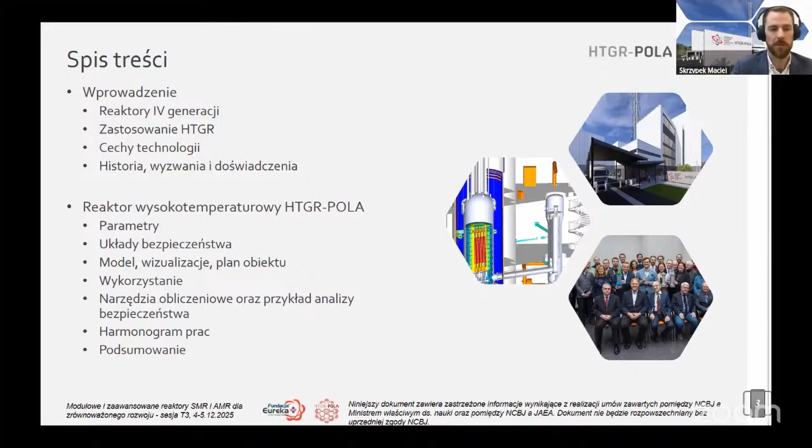To end with, I'll briefly describe the schedule. We have completed the core project or basic design stage, covering a considerable portion of the conceptual design. Still, there is a lot of work to do before the reactor becomes capable of displaying its technological potential within Poland. And I'll wrap up my presentation with a brief summary.

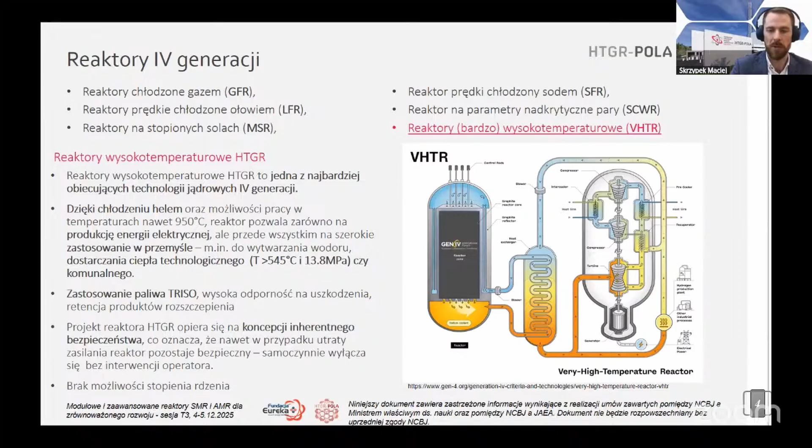Now briefly about the prospective applications of such high-temperature reactors, the advanced Generation 4 reactors. First, they are capable of providing adequately parameterized heat to industries, chemical, petrochemical, and any energy-intensive industry, since the temperature ranges, as I said, in excess of 700 or even 950 degrees Celsius for primary circuit helium.

After giving off the heat to the secondary circuit part, we can attain steam close to 600 degrees Celsius or even higher for helium-helium exchangers. This gives us almost 300 degrees more compared to what light water technologies are capable of offering, be it SMR, that is scaled PWR or BWR reactors, or large-scale ones, whose steam and heat temperatures range between 270 to 300 degrees Celsius.

The secondary circuit temperature of around 600 degrees allows for providing heat to branches of industry that involve iron smelting or generation of hydrogen by means of a sulfur-iodine cycle. Quite obviously, electricity production or gasification of coal. As regards lower temperature ranges, petrochemical industry and chemical paper manufacture can successfully make use of these properties.

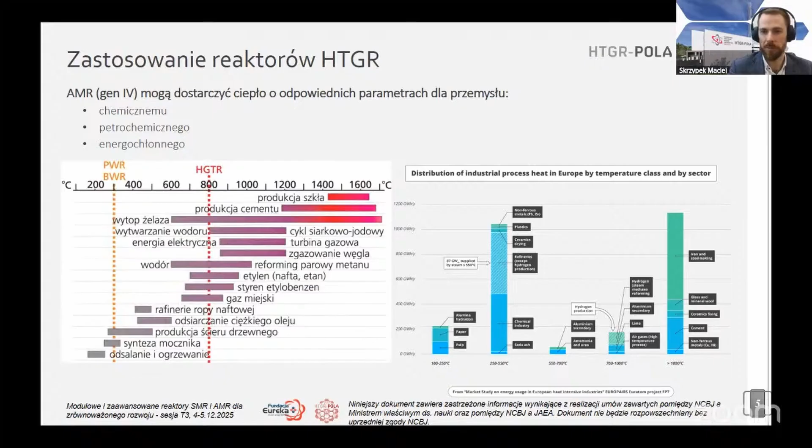When implementing and then commercializing the technology, we can really see a remarkable potential of its use, be it in Poland or elsewhere across Europe. I think I now should cover the major features of the technology of our interest. As I've mentioned, the very high temperature of helium at the reactor outlet is primarily apparent.

The applications in technological processes or electricity production can be notable. On the right-hand side, the HTGR-POLA diagram schematically shows the reactor as a 30 megawatt one. The primary circuit is marked in red, the section where the hot helium is directed to the steam generator, where it releases heat to the feed water, which is subsequently heated, superheated, and steam is generated, whose pressure is 13.8 megapascal and over 560 degrees Celsius.

This is the secondary part, which subsequently leaves the containment and is led to the engine room. Then it may go directly to the turbine, where electricity is generated, or portions of the steam can be used to produce electricity for the plant's own needs, the remainder being sent to the reboiler, where it can be used as cycle steam, basically useful in industrial processes.

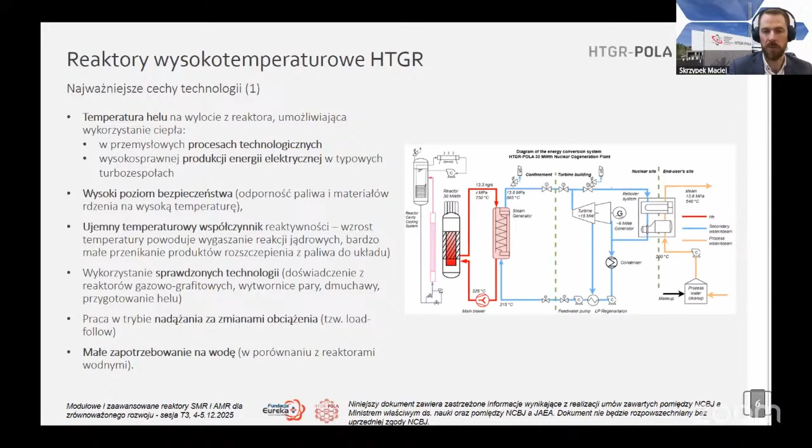The scenario of core meltdown, impossible as it is, is prevented due to the following factors.

Compared to light water technologies, the underlying concept here is very different. And what I mean by that is primarily a low power density, almost two orders of magnitude lower than the one in light water reactors. Consequently, the decay heat is reduced. It gets proportionally lower after the shutdown with use of reactivity control systems, or caused by the negative reactivity coefficient.

At the very beginning, once the reactor is shut down, the power drop can be typical, like 7 to 5%, then decreasing exponentially to 1%, and then tenths of a percent, this being much less power to dispose of compared to light water technologies.

Moreover, the low density of the structure of the core itself is due to the use of several materials around the fuel, while helium itself is of small thermal capacity. Graphite, the material used in the core's construction, has a considerable thermal capacity. Its thermal characteristics are very good, including thermal conductivity, and primarily it is resistant to high temperatures. All in all, it perfectly fits as the reactor's construction element.

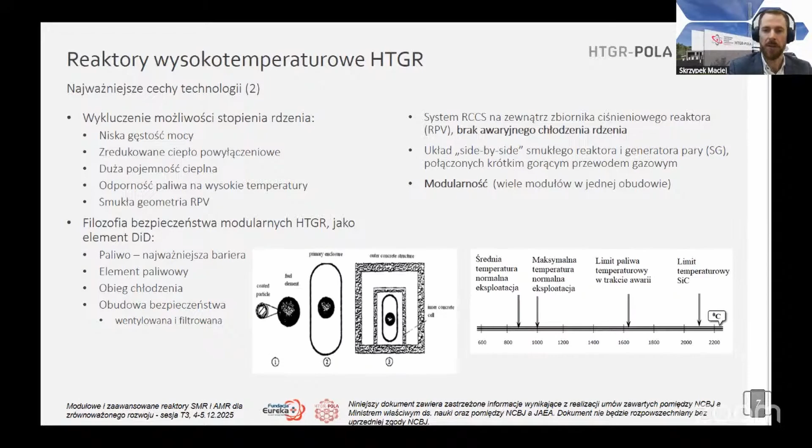As I said before, HTGR reactors, whether experimental or commercial, have been implemented and applied in the past. Hence, we've placed a bet on this particular technology, since because of its high TRL coefficient, it has a proven record. It first appeared in the form of spherical or prismatic pebble-bed technologies as applied in China, Japan, the US, and Germany, where it saw powerful development.

Rather than modular reactors, those were high-power technologies, a concept that developed in the 1970s, which sought to produce high amounts of electricity and heat. Although quite successful, the approach changed with time as the inherent safety of the reactor came to the fore.

Based on the 10 megawatt HTR-10, a research reactor still operating in China, Chinese engineers developed a high-temperature reactor called HTR-PM, 250 thermal megawatts, with a capacity to generate roughly 210 electric megawatts based on two reactors operating with one turbine set. This technology has been succeeded by...

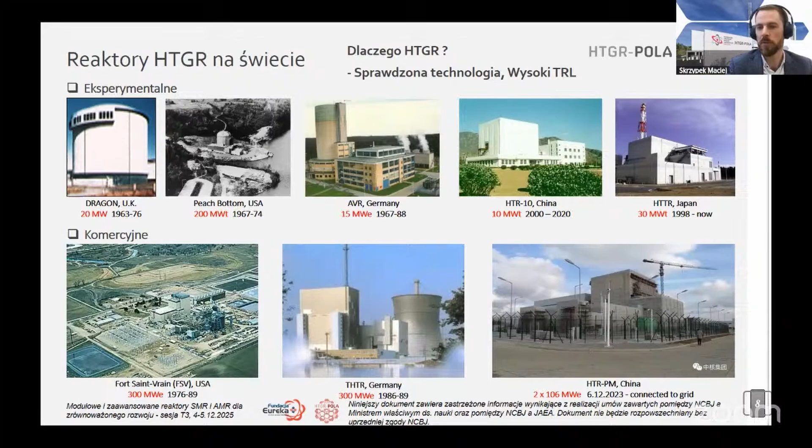How did those projects develop? Let me use the Chinese examples, or those of Japan. Our national center collaborated with the Japan Atomic Energy Agency. Basically, the task is to turn a research reactor into a commercial reactor.

It is quite a long way to go, and therefore the HTTR in Japan or the HTR-10 in China first attained criticality at the turn of the century, and it took 15 more years or so to put an operational commercial version in place.

To build a commercial reactor straight away is perceived as a somewhat risky venture industry-wise. Hence the need for a research reactor that allows excluding certain shortcomings and other problems on a small scale, demonstrate the operationality, and only then apply the concept at a commercial level.

In Poland, this approach enables the stakeholders to talk to those in charge, to actually make the state authorities, such as the nuclear regulatory authority, as well as industry, aware of the technology, demonstrate to them its safety features and economics, and the cogeneration potential based on the use of high-temperature steam in a variety of sectors and purposes.

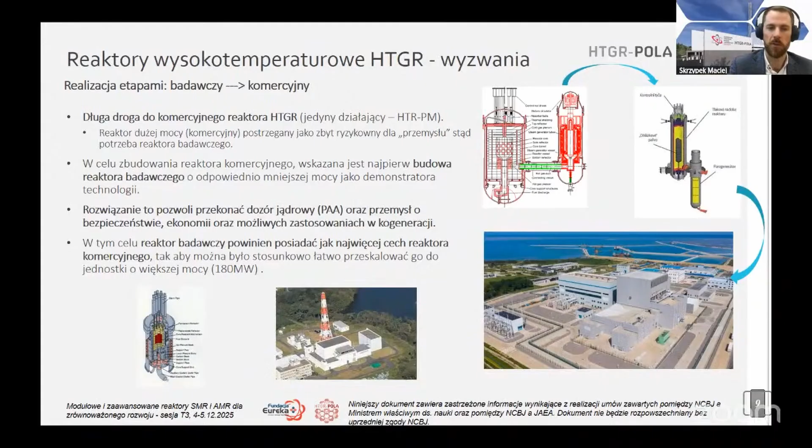Now about the actions and research carried out on HTGR at the National Center for Nuclear Research.

Having said that, to actually implement the technology, one needs years of effort. The technology in question has been under development at our institute for quite a while now. We've been in touch with it, so to put it, for a decade now, really.

In 2017, we got involved in a European project to develop a Gemini Plus reactor as part of an international consortium. The National Center was the project's leader, and we demonstrated the reactor's cogeneration potential, taking advantage of the technology, showing its safety, robustness, and teaching ourselves how to design such a reactor, how to analyze its safety features, and primarily involving ourselves in an international milieu, drawing upon our French, German, and Japanese colleagues' experience.

As a follow-up of that project and the National Center's engagement, a national HTR was developed as a pre-concept, or the first tangible Polish-made product in view of a future HTGR. That was back in 2019 to 22.

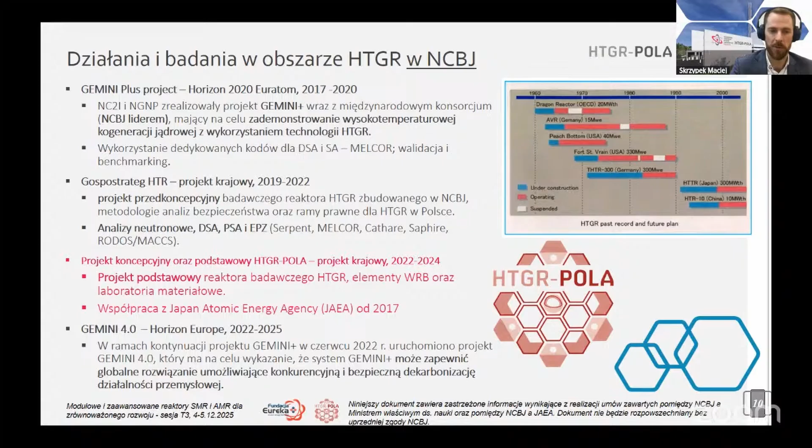Now, what's the mission of the demonstration reactor known as HTGR-POLA? It's apparent in its main functions, actually 4 of them. First, competence building, based on the perspective of development of the demo reactor and on the design process of its commercial counterpart. We have shown that designing competences can be attainable.

While designing, licensing ought to be always borne in mind as the next step of the process. While designing, the related supply chain should be taken into consideration as well. And as much as the demo reactor is the first of the kind, and indeed the first and only, keeping in mind the solution's modularity, the supply chain has been mapped for the elements and components indispensable for the technology concerned, based on the need to ensure a high rate of supplies from basically the local market, this being highlighted as a competence building aspect.

Next, construction and operation are very important competence building elements. As the National Center, we are presently running Poland's only active research reactor in close cooperation with actual operators elsewhere, this giving us clues of how to become an operator and what requirements should be followed also in the design process.

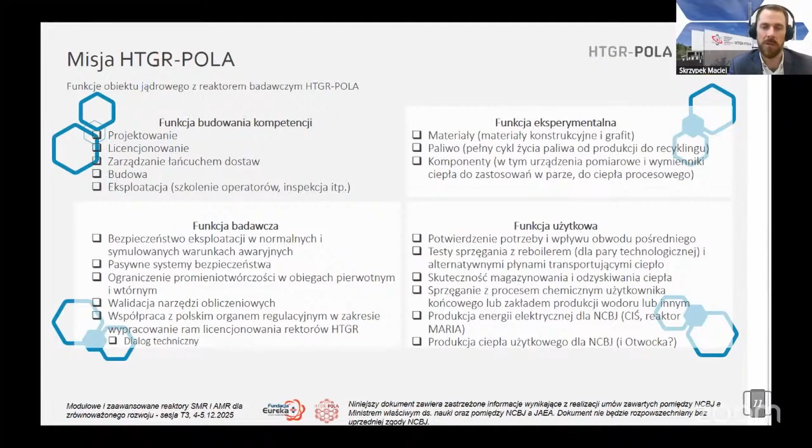We've proved capable of demonstrating the transfer and storage efficiency in this respect. I've mentioned our close cooperation with the Japanese agency and our Gemini project experience.

Consequently, HTGR-POLA is based on two concepts, some of its elements having been taken over from the Gemini Plus solution, while some others have been proposed by our Japanese partners.

As far as Gemini Plus is concerned, with the forthcoming commercial reactor concept at the back of our heads, which would follow the Gemini Plus geometry, also the active core concept, the structure of the fuel blocks with separated coolant flow channels and separated fuel element holes within the fuel block, are likewise taken from Gemini Plus.

The same is true for our proposed reactivity control system and dedicated fuel elements or reflector block elements, and also for the whole energy conversion system extending to heat transportation and use of the reboiler. Furthermore, certain safety systems do follow the Gemini Plus solution.

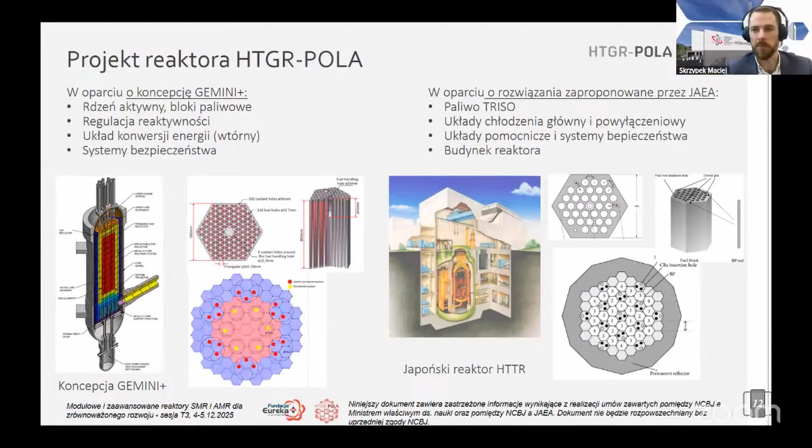Let me show you a block specimen, if you can see it, right hand side corner, being a model of the Japanese fuel block, and there's the other one of our POLA. The solution of one block placed over the other together makes up the core, which is a solution shared by the Gemini Plus and HTTR concepts.

As I've said, the core as such is composed of fuel blocks. Now let me invite you to look deeper inside into the very fuel particle. TRISO namely consists of uranium dioxide particles coated by several layers.

The first is porous pyrolytic carbon, the buffer layer. Then comes another internal layer of pyrolytic carbon. Then we have silicon carbide, which is crucial for the fuel's chemical resistance, and the outer pyrolytic carbon layer, ensuring the particle's operation under high temperatures.

Then there is a pretty small particle of less than 1 millimeter in diameter, which in itself forms a sort of safety containment for the fuel element inside and is placed in the fuel compact. The fuel compact is in this case a 5 centimeter high cylinder, diameter 12.6 millimeters, within which 2,500 to 3,000 TRISO fuel particles are compressed.

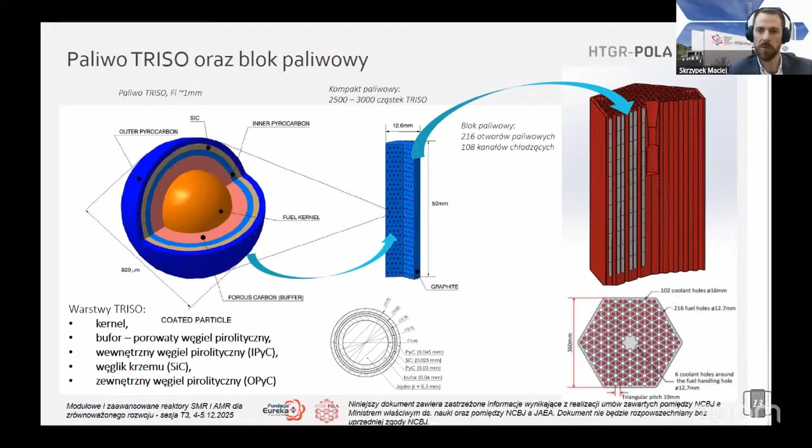The compacts enclosed in the fuel block release heat to the coolant by conduction through the graphite element to the coolant that flows inside separate holes through the block. The size of the block is 36 centimeters from side to side and 60 centimeters in height.

Using it, we can create an active core and a reflector surrounding it. These are the two important areas in the core, which is designed to consist of 6 fuel blocks of the sort we've seen in the picture.

The cross-section to the left shows the core's structure, consisting of a total of 13 full blocks plus 6 holes related to reactivity control elements.

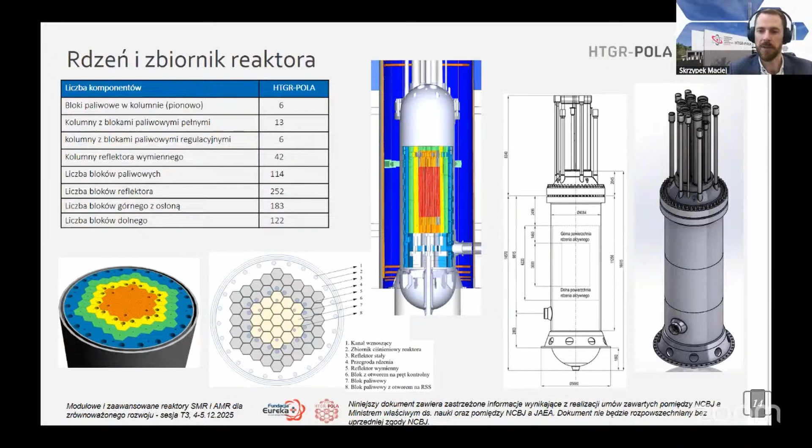Having covered aspects of construction, I'd like now to talk about HTGR-POLA's inherent safety features.

So first, TRISO fuel. Having regard to all these layers, and a coated fuel particle, which is placed in fuel compacts as another barrier to possible releases of fission products, let's observe that fuel compacts

are separated from cooling channels, so that the coolant avoids contact with fuel compacts or with TRISO. Columns of the backup reactivity control system are placed within the active core area containing fuel elements, rather than in the reflector only.

Very importantly, there's the reactivity coefficient, ensuring the strong negative fuel temperature feedback effect.

Owing to considerable amounts of construction materials and graphite, the solution is characterized by very slow changes in the reactor's temperature. Even in the event of a loss of active core cooling accident, the temperatures will not be growing, as you can see to the right.

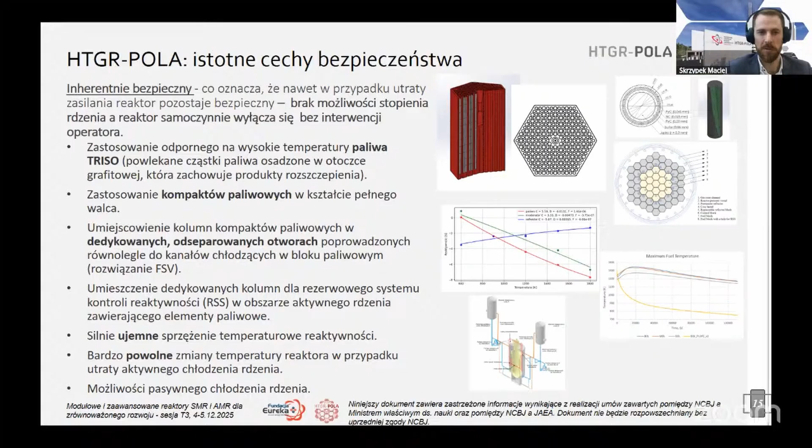Instead, the maximum increase takes place within 7 to 8 hours for some kinds of breakdowns, otherwise the maximum temperature will be decreasing. The most important aspect is the passive cooling option, using the reactor cavity cooling system, RCCS.

The system is meant to remove heat during the operation and in the event of breakdown. It actually functions on a 24-hour basis, ensuring removal of heat from the cavity while also maintaining the pressure tank integrity by keeping the tank's temperature below the limit for pressure vessel steel.

Importantly, it also cools the concrete shaft, the structure around the vessel, so that the concrete temperature is kept up to 60 degrees Celsius. RCCS works on an ongoing basis and is designed as a hybrid system, active and passive.

The active system works during normal operation, and the flow of water in the panels surrounding the pressure tank is ensured by the circulating pumps.

In case of failure, such as power failure, the water flows gravitationally, passively, through the same panels, bypassing the pumping system in the RCCS circulation.

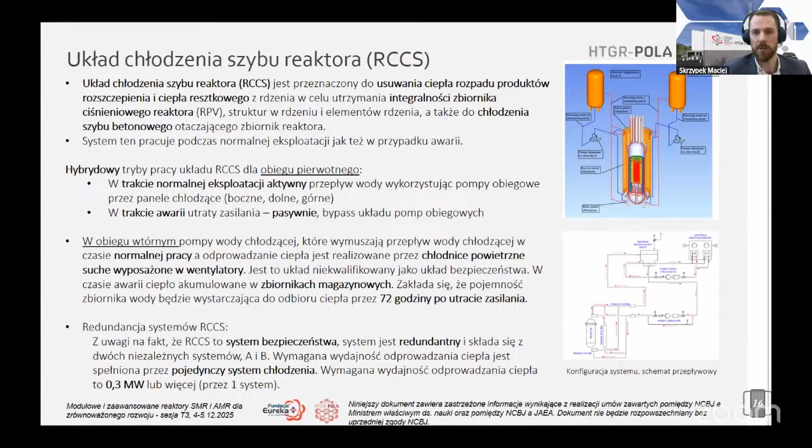Yet another system is the TRISO fuel element being part of the functional containment. The design makes use of the functional containment concept, basing on the most important barrier that retains fission products inside as TRISO fuel.

Then there's the graphite matrix, or the blocks, the primary cooling system, and the containment inside the reactor building, known from light water reactors. The air inside the containment is ventilated and filtered, taking account of the pressure, which is lower than atmospheric pressure.

First inside the containment and then in the reactor building. The latter pressure is slightly higher, but still lower than atmospheric.

Deterministic analysis of fission products releases takes into consideration three barriers, including TRISO fuel, primary cooling circuit, and the containment.

We lack experimental data for the graphite matrix and the graphite block, and so we employ a conservative approach by applying the three aforementioned barriers in our release analysis.

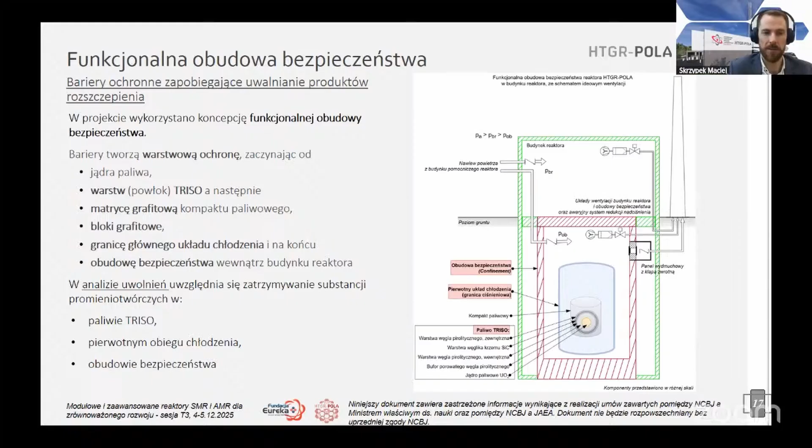Now, as far as the main parameters of HTGR-POLA are concerned, as I've said, it's a 30 megawatt reactor unit. As per the design, its expected useful life is 60 years.

The active core size is 360 centimeters in height, 6 layers of 60 centimeters each, with 165.5 centimeters being the active core diameter.

Surrounded by replaceable or fixed reflective blocks, it makes the vessel diameter slightly in excess of 4 meters. Importantly, the cold helium temperature inside the vessel is 325 degrees Celsius.

The top-down coolant flow through the active core enables warming up the helium to 750 degrees as the maximum coolant temperature. The high-temperature helium is directed to the steam generator via the pipe-in-pipe channel, as you can see to the right, where it releases heat to the feed water, which vaporizes, and then the parameters of the steam are attained.

Temperature 545 degrees Celsius, pressure 13.8 megapascal.

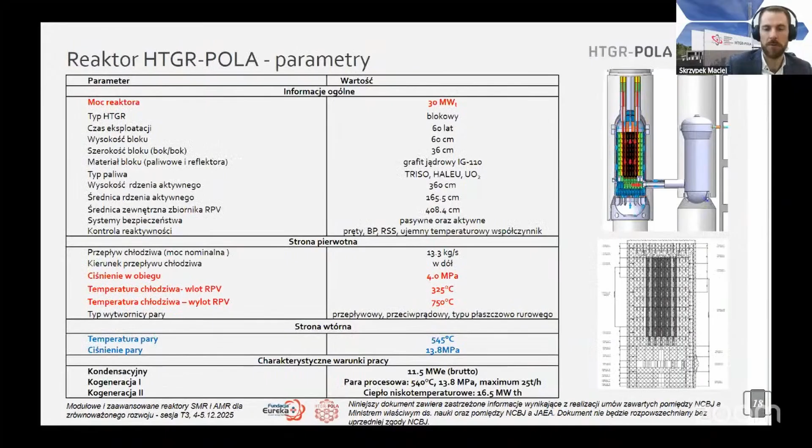The characteristic operation conditions are visible in this next slide. Without going into much detail, as regards the energy conversion system, helium is let into the steam generator and releases heat, enabling generation of high temperature steam, which is directed upwards through this red pipeline.

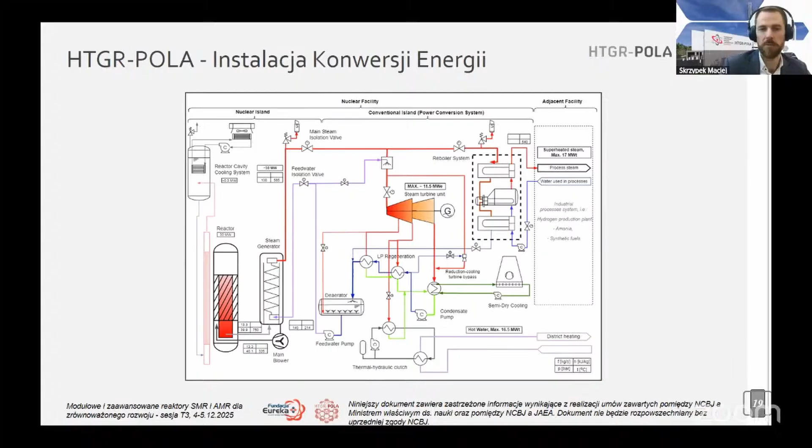The steam can be split and go partly to the turbine set to produce 11.5 megawatts of power maximum in condensation mode, and partly directed to the boiler, where up to 17 megawatts of high temperature heat can be extracted and forwarded for industrial processes. Here are the three modes mentioned: production of power, production of heat including district heat, and high temperature heat generation.

Specified here are system efficiency and performance figures for condensation or cogeneration. Even in the condensation mode, the system's electrical thermal efficiency is above 38% gross, slightly in excess of light water modular reactor efficiencies, but this was not what we primarily sought.

To avoid spending time on designing elements related to a conventional island, we decided to design the most available elements. This was also meant to keep the project's value, basically in cost terms, at a reasonable level. Hence, the turbine set is rather a standard one of the fairly small turbines that can be delivered to the site.

Also, the use of dry fan cooling towers decreases the efficiency, since we are dependent on outside air temperatures rather than on a wet cooling tower system. So this particular value is not as high as it could have been either. But again, it was not a key criterion, so we didn't quite focus on increasing efficiency in this respect, as opposed to demonstrating cogeneration related operation modes.

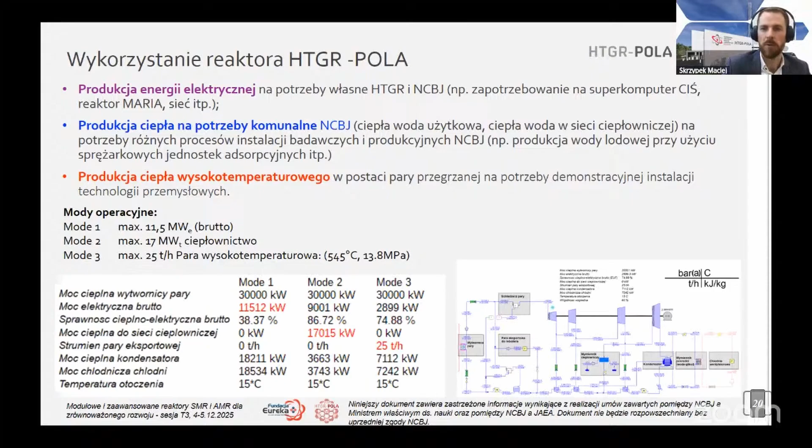Here are the values for three selected modes against nearly 20 such operation modes specified. Due to time constraints, I'm just showing the extreme ones, such as the maximum heat deliverable to industry, that is 25 tons of steam per hour, or 17 megawatts of power to meet the public utility needs of the National Center for Nuclear Research, or as low temperature heat in a district heating system.

Now I should like to show you some visualizations of our HTGR-POLA project. To the right, on the bottom, you can see the entire reactor installation consisting of two basic parts: the nuclear island, marked orange, which includes the reactor building, auxiliary reactor building, and spent fuel storage building, as well as conventional elements of the non-nuclear island, such as the engine house, water treatment plant, auxiliary boiler house, or firewater pumping station. There's an operations building, conference rooms, and importantly, the electric switchboard building, cooling water circuit pumping station, and fan cooling towers.

These elements are basically traditional, conventional technologies available off the shelf, so to speak. Innovative elements in this project are identifiable in the reactor building and in the design of the reactor itself, rather than in the non-nuclear island facilities.

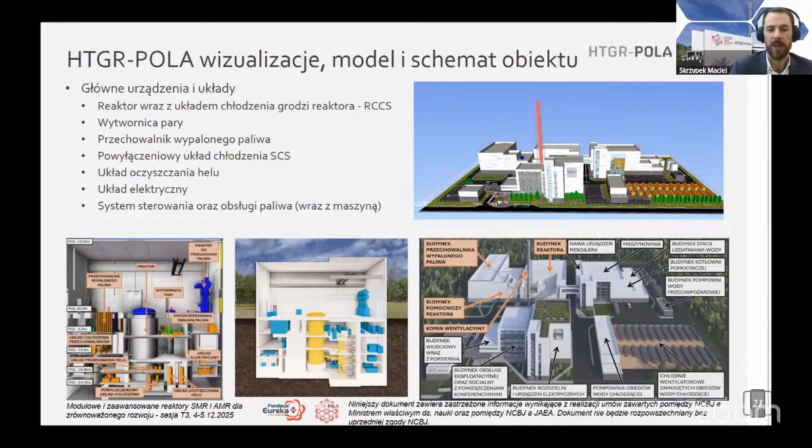Now a few cross-sections of the buildings concerned. The reactor building is situated under the ground.

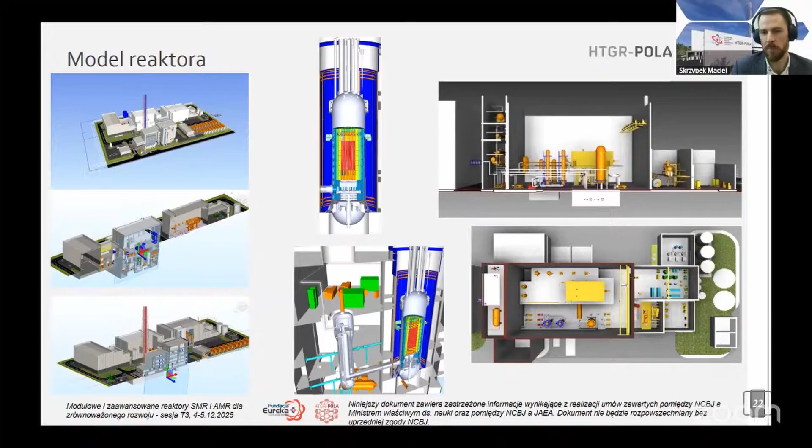The blue marks the RCCS, the absorption of afterheat, the system that surrounds the pressure vessel and absorbs heat from it. To the right is a view of the engine room together with the reboiler set situated on the left.

Now, what does it look like in a nuclear facility plan in relation to the reactor's location within the national center area? All the buildings have been designed and adjusted so as to fit the available area.

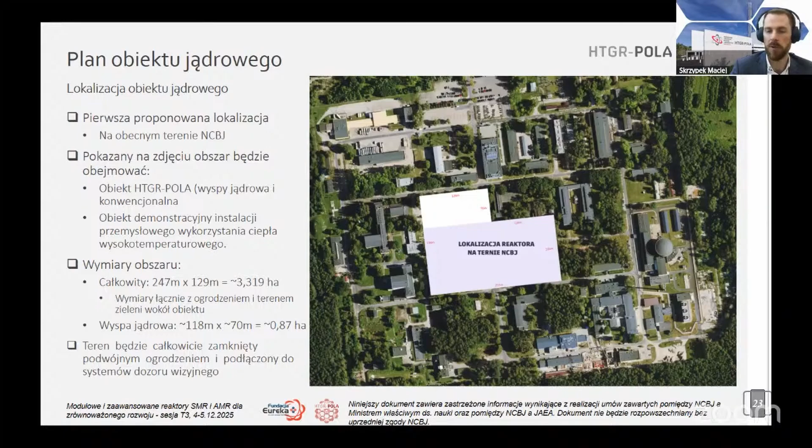So the facility has taken approximately 3 hectares of land, 250 by 130 meters in size, including the fence and the green space around the facility. The area consists of a nuclear island and a conventional island and demonstration facilities where high-temperature heat is transferred to industrial installations.

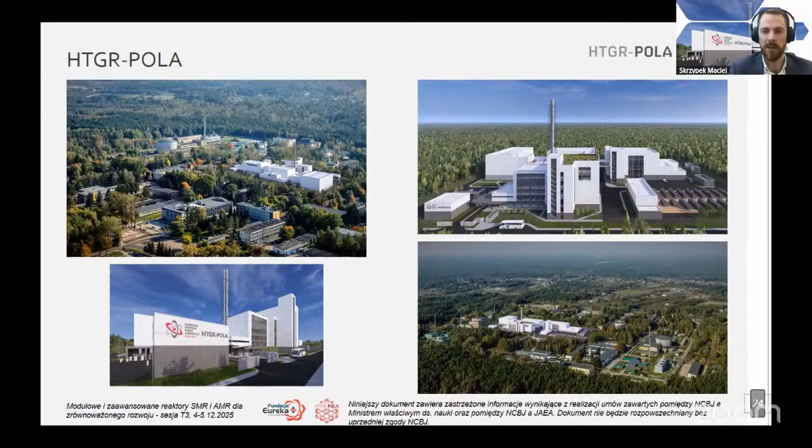Based on the model I showed you a moment ago, some very nice visualizations have been rendered showing the reactor's location within our campus, allowing us to see the buildings, their dimensions, and the sizes of installations compared to those of the Maria reactor.

Some exemplary research and analyses. Here just the outcomes are quoted, but let me brief you on the spectrum of analyses carried out.

These include neutron analyses using dedicated computational tools such as Serpent, enabling calculation of power distributions, core composition, and a number of other important ratios or coefficients related to power generation.

Heat flow analysis tools, American, French, the CFD approach that was applied at the design and safety analysis stages, calculations of releases using appropriate tools, and probabilistic analyses enabling the demarcation of planning zones around the nuclear facility.

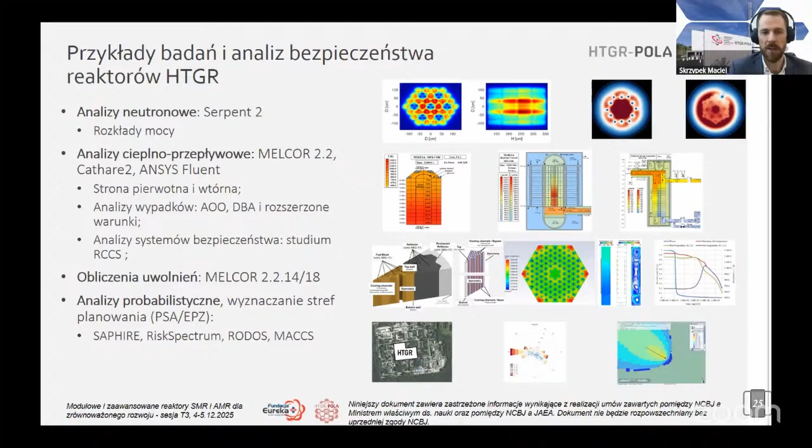Now, a thing which I hope may be of interest to you: we have at our disposal certain tools that allow us to calculate temperature, pressure, and flow rates in individual elements of the primary and secondary circuits.

This screenshot visualizes a temperature distribution for the core in a steady state, that is, under normal operation at full power. At the initial stage of the reactor's life, the maximum temperatures are not in excess of 1000 degrees Celsius, with the hot helium leaving the pressure tank at 740-741 degrees, these being the parameters directed to the steam generator.

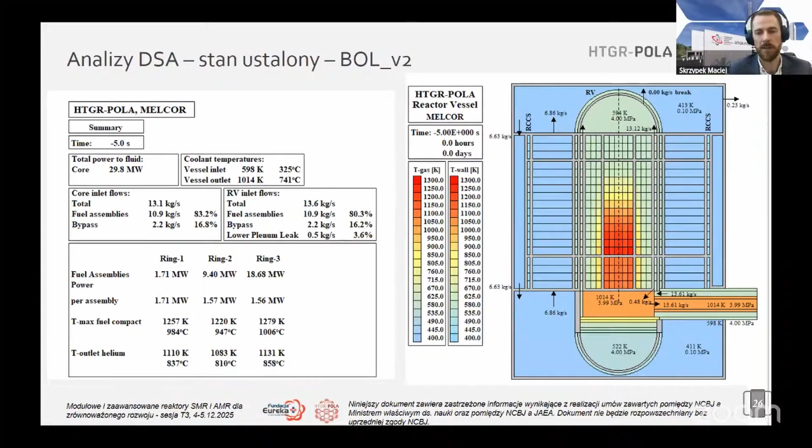This is the fragment where the pressure tank is visible, the cavity, and the RCCS.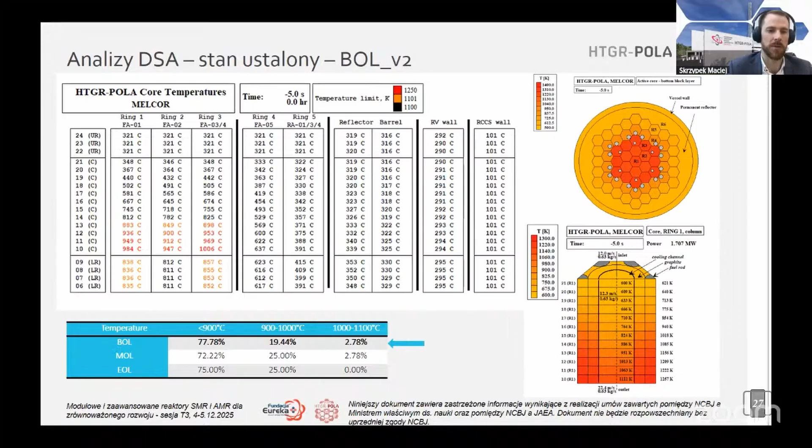Looking deeper to the central fuel column and all the fuel elements, the mean temperature is below 900 degrees Celsius, so more than 70% of the core is kept at a relatively low temperature, with just one unit exceeding 1000 degrees while in operation. This ensures a considerable safety margin.

With not much time left, let me mention the design analyses.

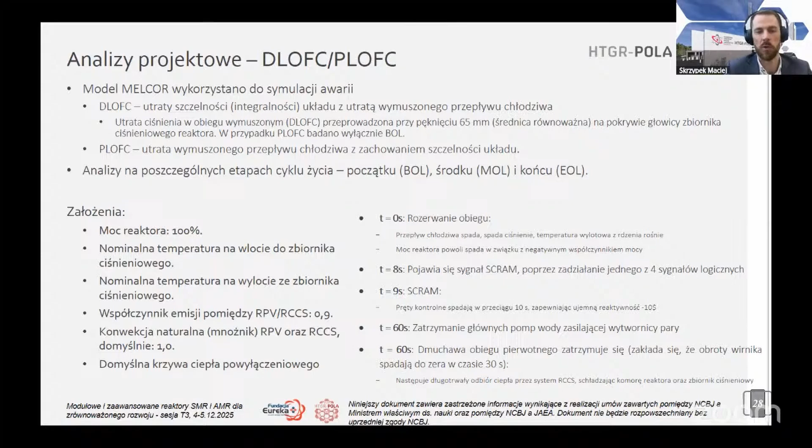Although these are some of the most serious accident scenarios...

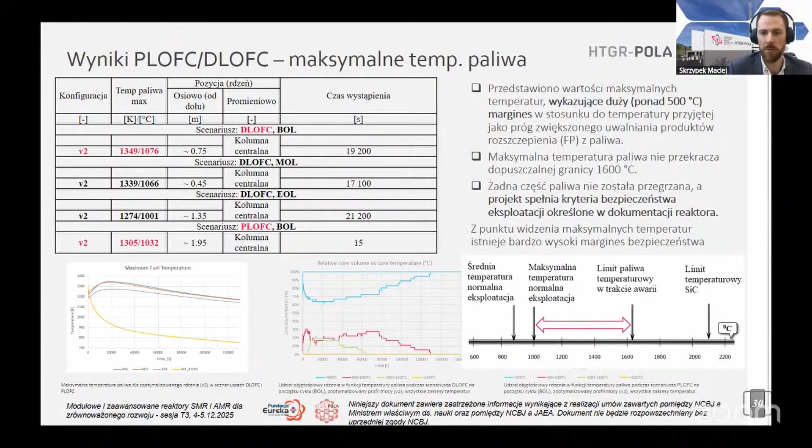The ranges are shown in the table here.

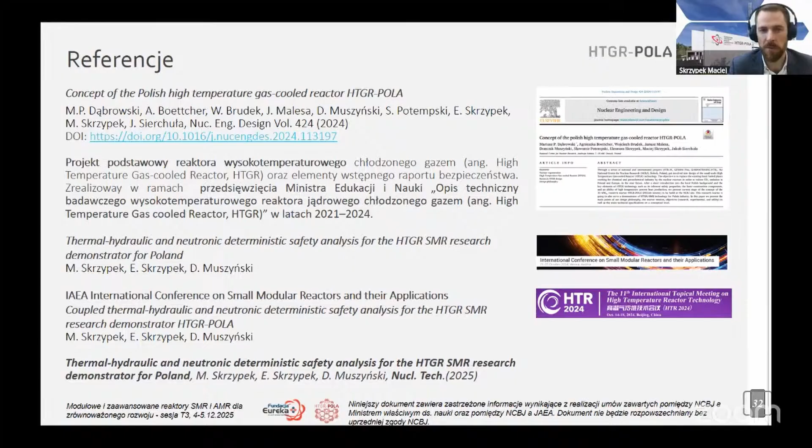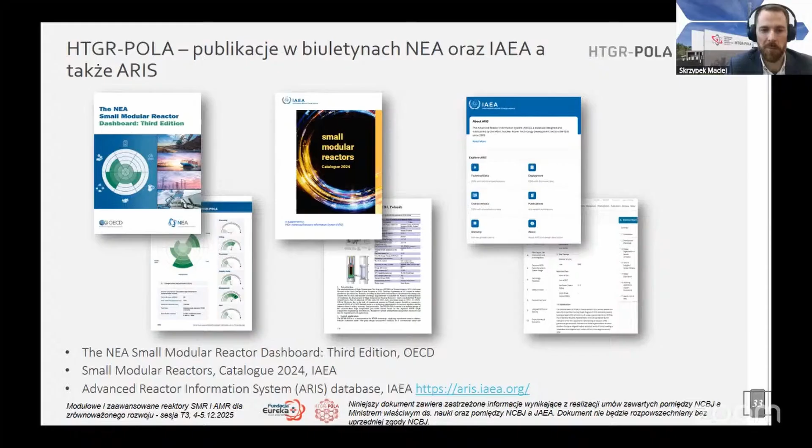What's ahead of us now? We've been through a number of stages already.

The basic design has been completed as of 31st of December 2024, and in the middle of this year it was officially accepted by the ministry.

Since May this year, we've been in a technical dialogue with the National Atomic Energy Agency.

Next year, we hope to continue our work on the technical design and the detailed design. As a further prospect, follow-up licensing work is to be done.

The expected construction period is roughly 4 years, and this is strictly associated with our further work on the technical design. So if we start again next year, we should be on schedule with these specified periods.

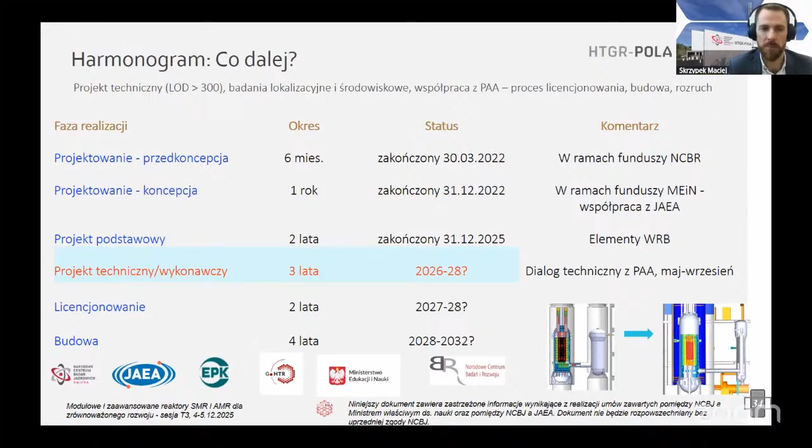But we do count on contributions from our partners we've been cooperating with, such as JAEA or Energoprojekt Katowice. In cooperation with these institutions, I think such a schedule could be as feasible as possible.

Shortly to summarize, let me stress that this is a reactor that, as Mariusz said yesterday, has been designed with a 50% Polish intellectual output - the first such project since the Maria reactor.

It was developed resulting from almost 3 years of meetings and discussions held in Japan and in Poland, trips, exchange of experience and expertise with the teams, a total of 18 volumes of documentation, over 3,000 pages of technical descriptions, drawings, and models of all the components, some of which have been printed out.

We've developed the characteristic operation modes. Arriving at the present stage was enabled by stable funding, cooperation between the industries involved, and by taking advantage of the experiences of international R&D teams.

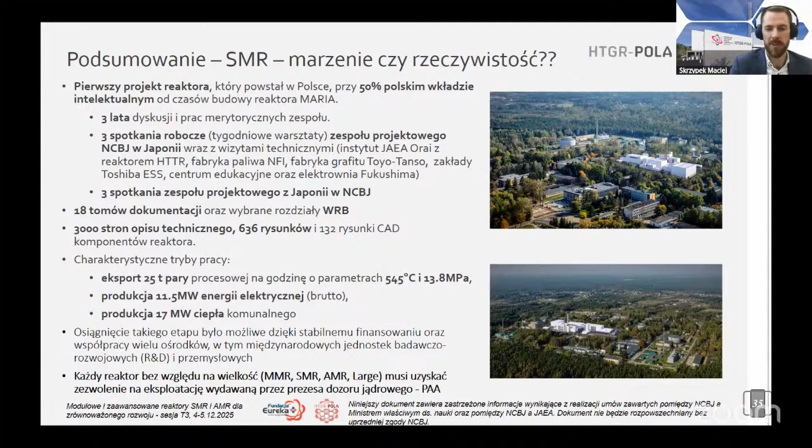We constantly bear in mind that any reactor, be it the one in question, as well as any SMR, MMR, or any advanced modular type, and the large reactors, all have to obtain an operating authorization issued by the head of the Nuclear Regulatory Office. Safety first, and I'm positive that our HTGR-POLA reactor is founded upon this very idea.

Thank you very much for your attention, and I'm ready to take your questions, if any.